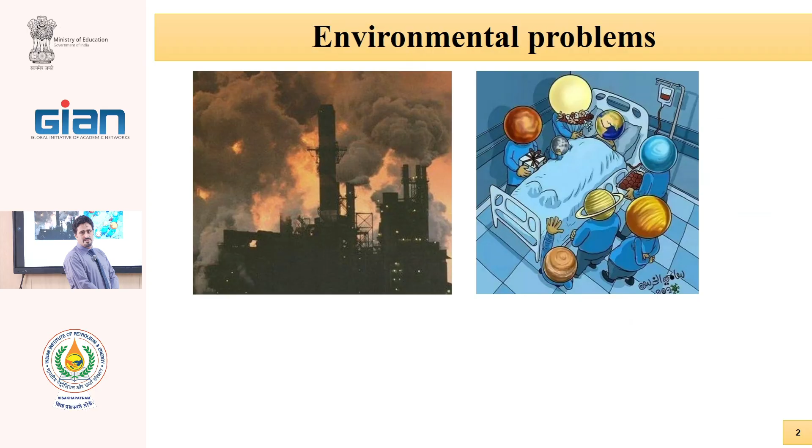Therefore, because in the production of many foods we use chemicals, the use of chemicals is a problem.

I want to show some problems as a caricature. You see, when we cut the trees, it affects the life of most animals, as well as humans. Humans are animals too. The restriction of water and water crisis is very important in many countries, especially in Iran. Iran has a very, very critical state regarding water.

With the growth of cities, we must remove jungles and forests, and there are many other problems. Weather problems too—you know Delhi has the very bad air in the world, and there are many problems.

As environmental scientists or environmentally friendly persons, we must, with the use of science, cause growth in the environment, and we must treat pollutants from the air, soil, and water to green life.

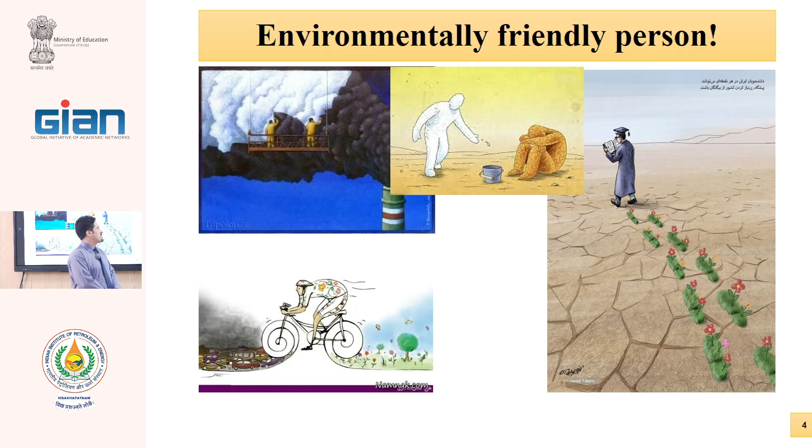About water, we know that only 1% of the water in the world can be directly drunk. 97% of water on Earth is saline, because it's located in oceans and seas, and we cannot use it directly—we must remove the salinity, remove pollutants, and after that use it.

And this cleaning needs a lot of energy, and the production of energy also pollutes the weather and the earth. Therefore, the first step for environmental protection is low usage.

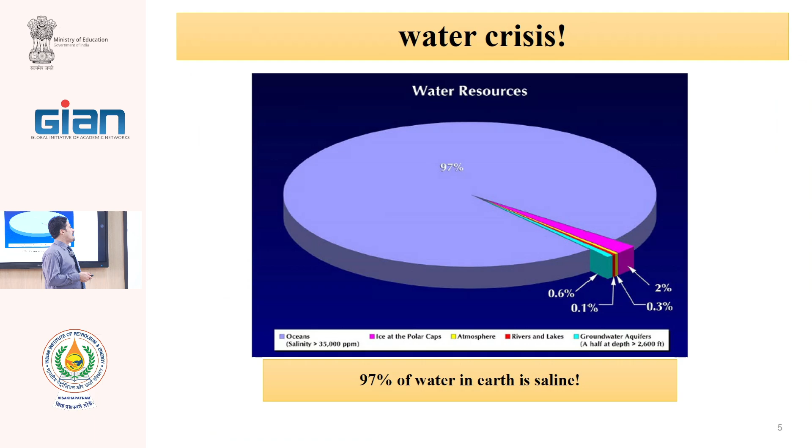We must use fewer chemicals, fewer clothes. 100 years ago, when we bought clothes, we kept them for 10 years. But now we change clothes every day, and this is a problem, among other examples. This means the lifestyle of humans has changed, and this is a main problem of the world.

As a case study of the most used membrane process in water and wastewater treatment: the membrane bioreactor. There are maybe 1,000 MBR plants in the world. Very, very common and very, very simple method.

We have an activated sludge system as the traditional one, and over these 40 years, for reducing the biological tank reactor volume, UF and MF membranes are used for separation of microorganisms. As we discussed before, most use hollow fiber membranes, mostly immersed ones, not external ones, and we use aeration for reducing fouling.

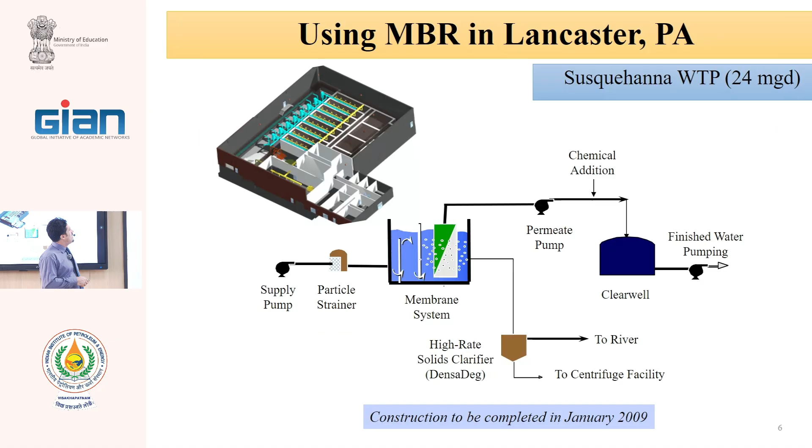In new systems, after MBR, AOP processes are usually used for complete removal. This is an example of the use of the MBR system in Lancaster City.

Another system, as I say, uses UV after MBR. UV for complete removal is fabricated in Canada with a capacity of 12 MGD, million gallons per day. A big one, relatively, with two steps.

In calculation of the volume for CSTR, continuous stirred tank reactors, usually dividing one reactor into two reactors can improve the efficiency, as you learned in the reactor lesson. Therefore, this system uses two parallel, two series reactors for increasing efficiency, and after treatment, uses UV for the second step, because here the concentration is higher.

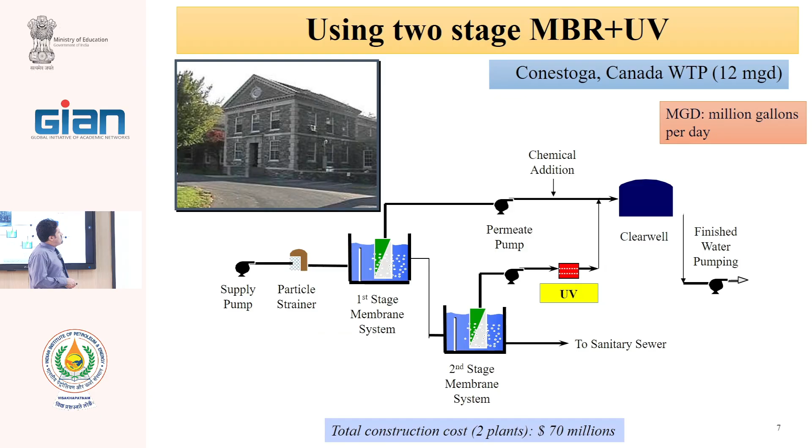UF in the MBR, UF and MF are used for separation of microorganisms. In most cases, we can use UF for water purification, not wastewater. We know water is different from wastewater. Water purification means in this factory, in Kamloops, Canada...

They use hollow fiber UF for treating drinking water, and the aim is removal of bacteria, disinfection, and any impurity such as turbidity and some heavy metals. If there are heavy metals, tight UFs are used. We have two types of UF, loose and tight, and the molecular weight cutoff can be different.

In this case, hollow fiber UF is used for purifying the water. The hollow fiber is used, similar to the photograph of these systems, and this is the pumps that are used.

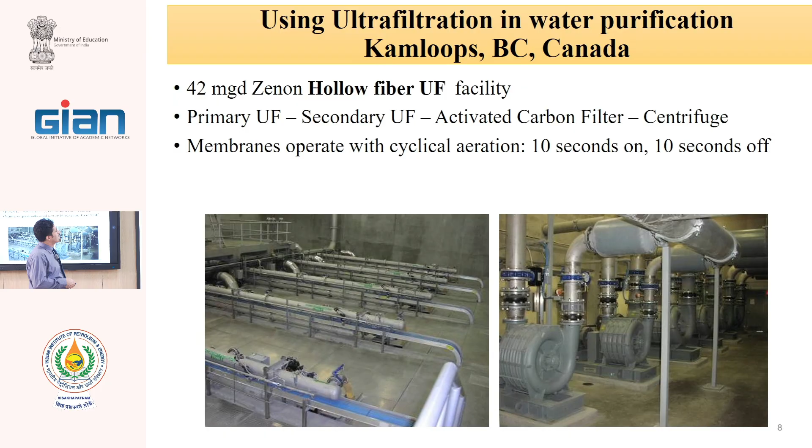The most common application of nanofiltration in industry is removal of hardness, removal of calcium and magnesium from drinking water in most industrial water treatment plants.

Now, for drinking water, we usually use river water and well water. River water has good quality and low hardness, but well water, due to contact with stones, has high hardness. Therefore, most water supplying companies using well water, for removing hardness, calcium and magnesium, usually use nanofiltration, because the concentration of NaCl in well water is very low.

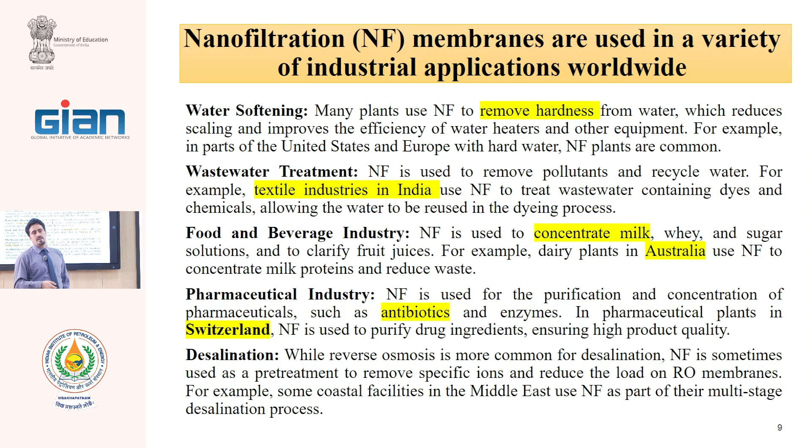NF can also be used in desalination. In some cases where we have low desalinity requirements, we can use nanofiltration because it needs low energy, and it is mostly used for brackish water.

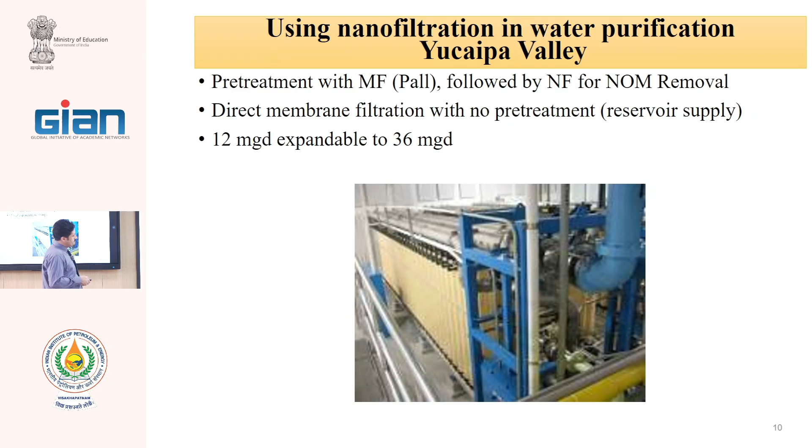The usual use, I'd say, is for softening, for removal of hardness. In most industries, this design is used for removal of both desalination and hardness, using nanofiltration as a pretreatment of RO. By using NF as a pretreatment of RO, the scaling of the RO membrane is reduced, and the recovery is improved.

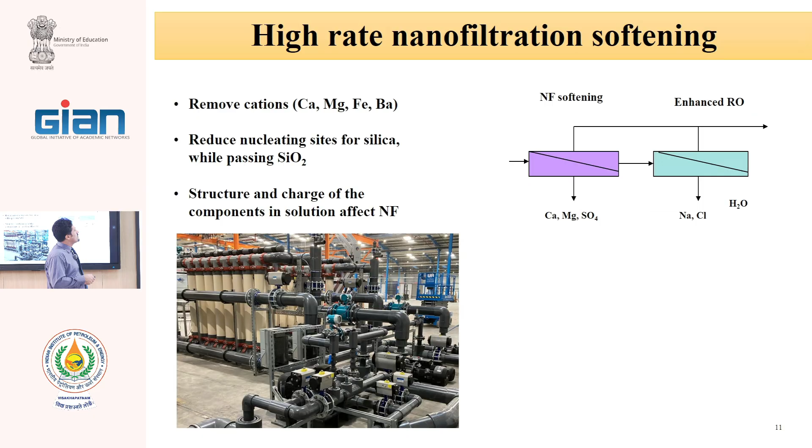In RO membranes, if we use only RO without NF, the recovery will be 60%. But with use of NF and separation of the sedimentation agents, calcium and magnesium, we can reach a recovery of 80 or 90%. Therefore, in some cases, NF is used as a pretreatment of RO.

If you check on the internet, you will see this coupling mostly used in recent years: hollow fiber MF or UF used as a pretreatment of RO, and after RO, UV/H2O2 used as disinfection and for removal of organic matters.

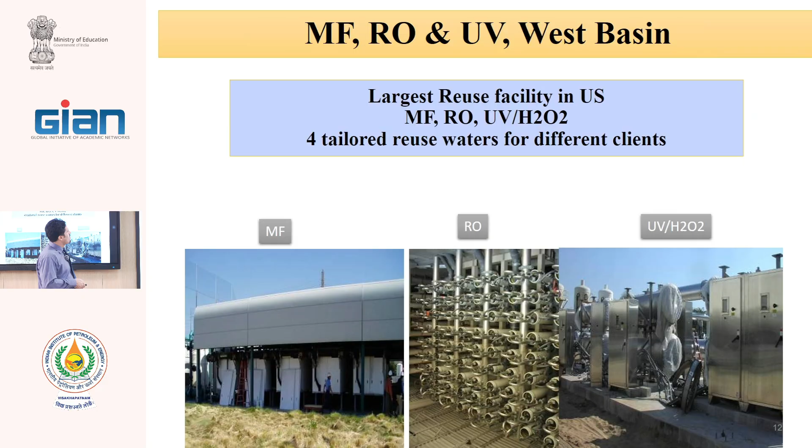Another environmental problem is the greenhouse effect. When we have carbon dioxide or water in the air, some of the returned energy can be captured by the carbon dioxide, causing an increase in temperature. This increase in temperature can cause many problems in the ecosystem.

One of the most important applications of gas separation membranes is removal of carbon dioxide from flue gases. Yesterday we discussed the application of gas separation. Gas separation is very important and has had good development in recent years, and most governments in the world are forcing companies to use gas separation membranes on flue gases.

Now it is a very important research idea to convert this captured carbon dioxide into useful materials and products. This can be used as a base of carbon and oxygen for production of other products, and now some companies use this for production of methanol.

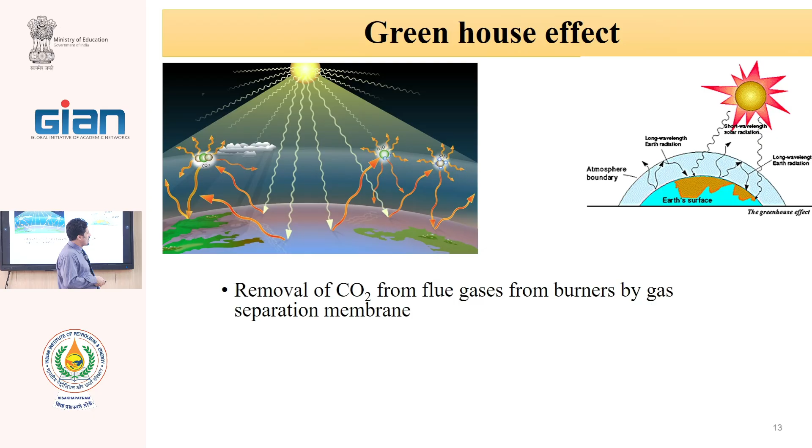And every one of these, for example whey, again can be refractionated into many compounds. There are similar diagrams only for whey, showing that from the whey, for example, we can separate lactic acid, and after that produce polylactic acid. Yesterday I said that the main biopolymer now used in the fabrication of membranes is polylactic acid, produced from lactic acid, and lactic acid from milk and yogurt is produced from whey. Therefore, it is a very green biopolymer.

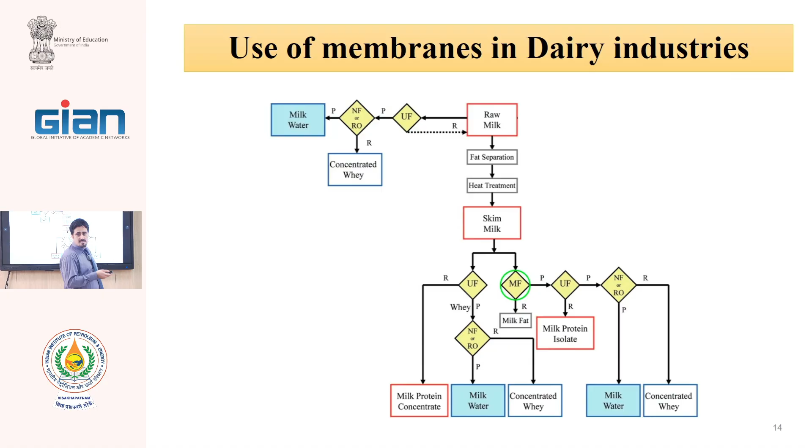The main application of RO membranes is desalination, and the biggest membrane plant is related to RO membranes. The biggest RO plant is located in Israel. Israel is a very little country, is very hot, and has a severe water crisis. The Red Sea, located near Israel, has a very high saline concentration, about 70,000 ppm. I think the Indian Ocean is 30,000 ppm concentration of salt, so the Red Sea is two times that.

But Israel produces sweet water from that Red Sea with desalination and uses it for agriculture, and is one of the biggest sellers of orange and apple in the world. Low on water, they use seawater and desalination for agriculture, becoming one of the biggest exporters of orange in the world, and a very delicious type of orange. This shows the good management of one country. The biggest desalination plant is located in Israel, and the second and third are located in the Persian Gulf.

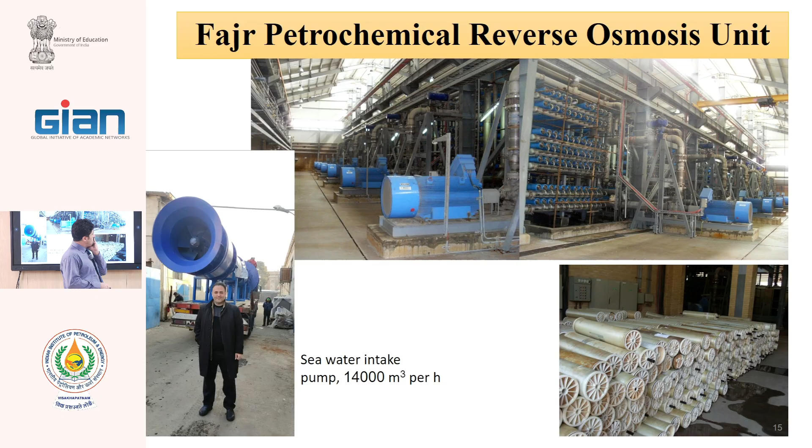Before the RO membranes, cartridge filters are used for removal of particles, and there are many pressure vessels for cartridge filters. Acid and anti-scalants are used in the feed of the RO for controlling scaling. With use of anti-scalants, we reduce the possibility of sedimentation.

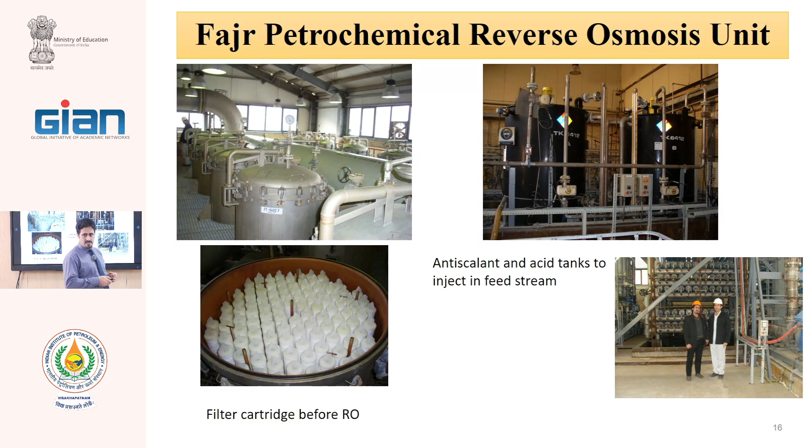Another application of membranes in petrochemicals in Iran is the use of tubular polymeric membranes. In the production of PVC polymer, one method is the suspension method. We also have an emulsion method and others. In the suspension method, the polymer particles are produced in water as a solvent, while in emulsion we have another solvent for production.

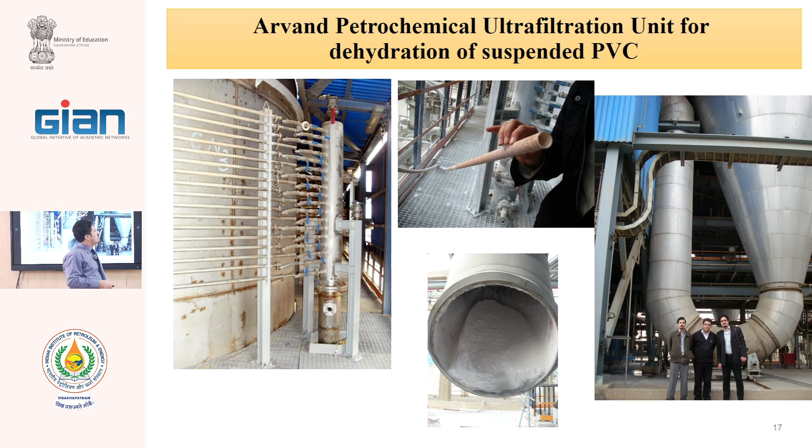For concentration of the water and separation of the produced powder from the reactor, two devices are used. One is UF tubular membranes, which reduce 40% of the water, and the remaining concentrated water goes to spray drying. This spray dryer is very big, with a 30-meter height. The heated concentrate from UF is sprayed from the top, and by the time it reaches the bottom, all the water vapor is removed and powder reaches the bottom of the spray dryer. Therefore, tubular UF can be used for separation of particles from suspensions.

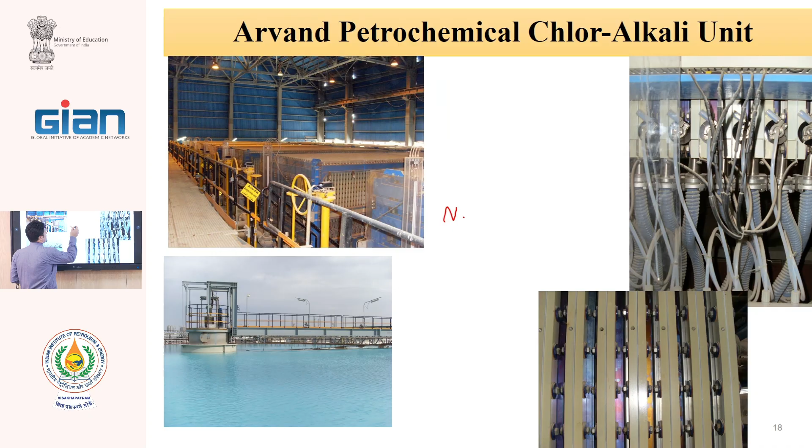Another application of proton exchange membranes, Nafion and similar membranes, is in the production of chlor-alkali units. This is a photograph of the Arvand petrochemical plant in Iran, which uses NaCl as feed and uses electrolyzers to electrolyze NaCl into NaOH, chlorine gas, and hydrogen gas. You know this reaction: with electrolysis of NaCl, we get chlorine gas, H2 gas, and NaOH.

The main purpose of this petrochemical plant is producing chlorine. The petrochemical plant needs this chloride for reaction with ethylene to produce ethylene chloride.

Ethylene chloride, okay, hydrogen. This ethylene chloride produces PVC. As shown in this slide, you see Arvand, a similar petrochemical. The main product of this petrochemical is PVC polymer. For production of the PVC, we need chloride. This chlorine reacts with ethylene, produces ethylene chloride, and this is polymerized to PVC.

But we have a byproduct, hydrogen, which is used for heating, goes to the heating system and combusts with oxygen. And NaOH can be changed to dry NaOH, or can be mixed with chlorine for production of the whitening solution.

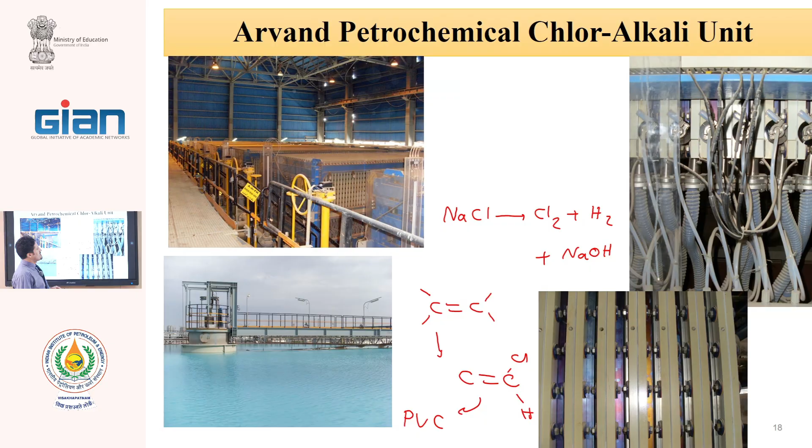Another major application of RO and NF is in cooling towers. Do you know what a cooling tower is? These towers, maybe you've seen them. What is the role of this cooling tower? In the production of electricity, we have hot reactors that should be cooled with water.

For cooling of the electrical production reactors, we use cool water, and the cool water comes into contact with the reactor, and the warm and hot water should be cooled for reuse. Here it's usually 30, and here it's usually 80 centigrade. For reducing this water, which has a very big volume, we use these cooling towers.

In cooling towers, the mechanism is simple. The water can pour from 50 meters, spraying to the ground. During this pass, some of the water evaporates, and when it evaporates, it takes energy from the water, and this evaporation causes a reduction of the temperature.

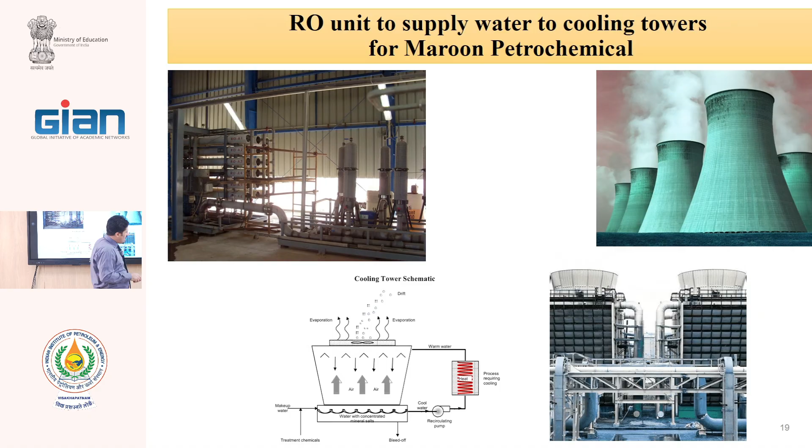These are simple, small plants, but in every electricity production facility, we have these RO units for desalination of this water.

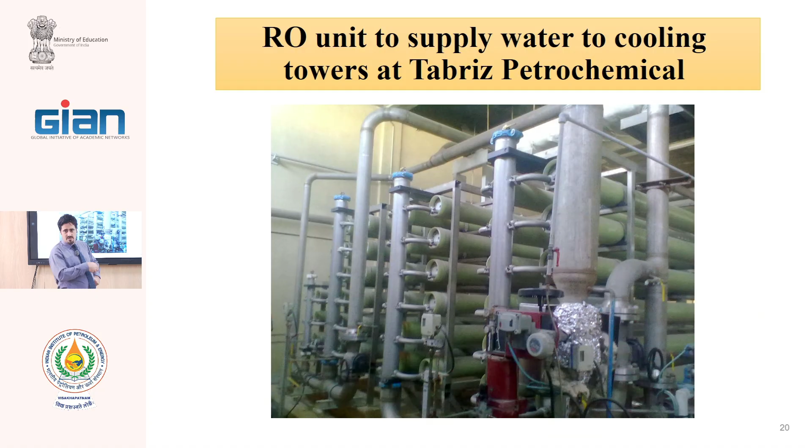This is another RO unit that supplies the cooling water of Tabriz petrochemicals. I have some projects with these petrochemicals, and I share my experience.

Another big consumer of water is the production of steel in iron factories, which need a lot of water for production, separation, and molding of iron and steel. Therefore, we need pure water, because the presence of calcium and magnesium can be a problem.

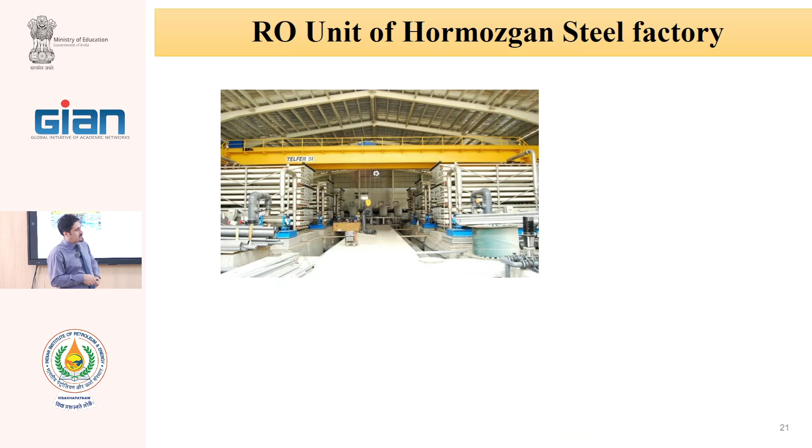And in Iran, there are also big RO units for producing steel factory water. Thank you, I've shared some of these applications.

There are also many applications for other processes that I will not discuss. Dr. Raka discussed the application of membranes in fuel cells, different types of fuel cells, and the storage of hydrogen and other applications.

For example, in pervaporation, I showed the Sulzer company process for separation of ethanol, separation of water from ethanol, reaching absolute ethanol.

That's used mostly in Brazil, and now membrane distillation is used in the Persian Gulf for increasing desalination recovery, because most RO units in the world are located in the Persian Gulf, in Kuwait, Emirates, Qatar, Iran, because of the water crisis.

India has good humidity, but in Iran, Qatar, we have no humidity, and we are all desert, no forest, no jungle. Therefore, water is very important in the Middle East area. Thank you.

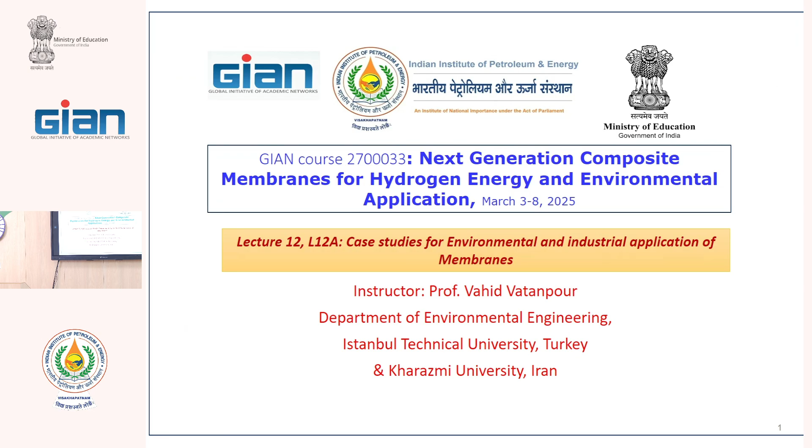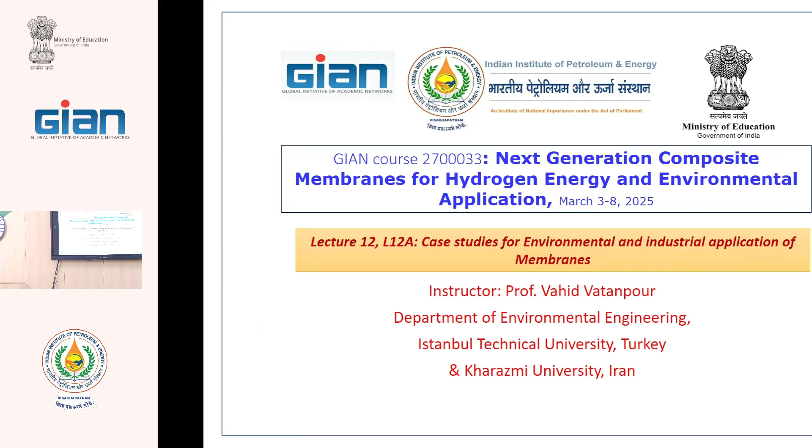I believe those must be MS pipes. MS, mild steel pipes, those are being used, right? Material of construction, mild steel pipes, I mean. This is iron, steel pipes, right, iron pipes. What is the problem with them? Corrosion usually takes place in those. So I mean, we cannot use steel pipes in these cases. But the MS pipes we are actually using, that might cause corrosion then.

Yes, corrosion is important in the membrane process. Before the entrance of the RO membranes, because we have high pressure, we use stainless steel. After the RO, both on the concentrate and permeate side, we use HDPE, high density polyethylene tubes, which reduces corrosion. But on the feed side, reducing the pH causes low sedimentation, and therefore we will have corrosion.

But in industry, we have different types of steels, with a coating, say 316, that has good resistance to corrosion.

And we have a very acidic solution. We have titanium-based corrosion-resistant tubes. Therefore, we have corrosion, and we can manage them. And this corrosion can go to the membrane surface and cause damage.